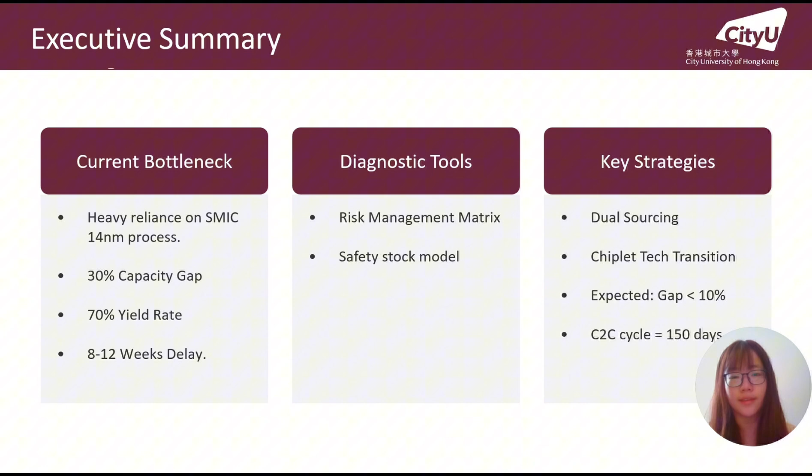At present, the supply chain faces several clear bottlenecks, including heavy reliance on SMIC's 14nm process, a capacity gap, a relatively low yield rate, and delivery delays. This problem shows that Huawei is facing not just a manufacturing issue, but a deeper resilience issue. So our group does not only focus on how to increase production; more importantly, we'll ask how Huawei can build a supply chain that can better resist shocks, reduce dependence, and recover faster. That is the main value of our idea.

The issue is especially important because Huawei is transforming from a telecommunication giant into an intelligent automotive solution provider. In this strategy, the Ascend 610 chip is the computational core of the advanced driving system, like the digital heart of Huawei's automotive business. That means once the chip supply becomes unstable, the impact goes beyond production efficiency. It can directly affect vehicle delivery, customer confidence, and Huawei's future competitiveness in the intelligent vehicle market.

So what is material flow resilience? Our group defined it as the ability to maintain a stable flow from wafers to finished modules under disruption and to recover quickly afterwards. It includes three dimensions: resistance, absorption, and recoverability. Resistance means avoiding single point failure. Absorption means buffering shock through inventory and planning. Recoverability means restoring flexibility through innovation and adjustment. This concept is important because it shows that resilience is not just about solving today's problem, but about preparing Huawei for future uncertainty.

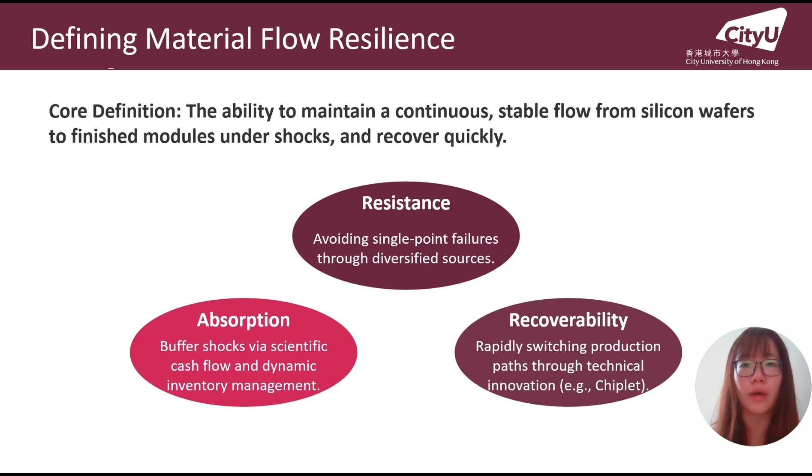Based on this idea, our report will continue in several parts. First, I introduce the background and the concept of resilience, and then my teammate will explain the material flow structure, identify the major risk, analyze the financial constraint, and finally present our improvement strategy. Overall, our key message is that improving resilience is not just about surviving disruption, it's about securing Huawei's long-term competitiveness. Thank you, and now let's move to the next part.

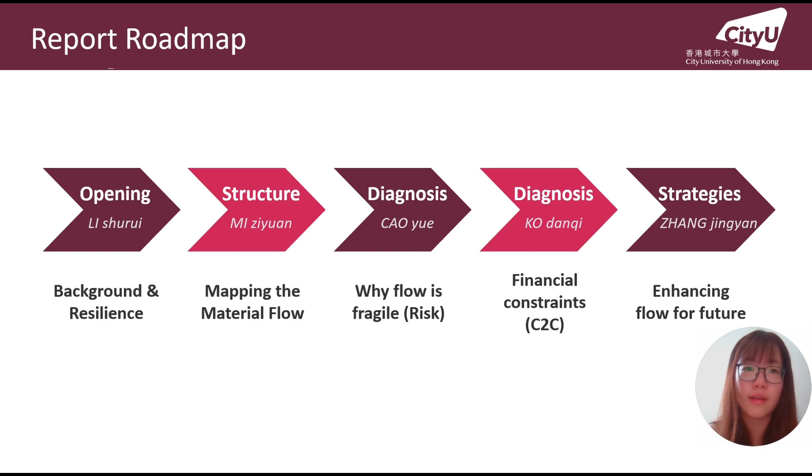Hi everyone, I'm Mi Ziyuan, a student responsible for the second part. Today, I will analyze the material flow of Huawei Ascend 610 automotive-grade AI chips, revealing its key links and potential risks. The Ascend 610 has a clearly defined three-tier supply structure and is a complex network built through the collaboration of 3 layers of suppliers.

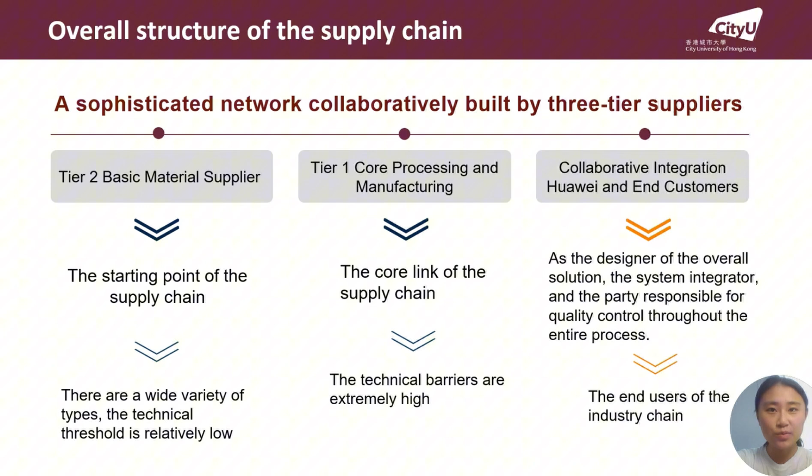Tier 2 basic materials supply serves as the starting point, offering a wide variety but with relatively low technological barriers. Tier 1 core manufacturing and processing is the core of the supply chain with very high technical barriers. Huawei, as the overall solutions designer and system integrator, is responsible for end-to-end quality control and interacts directly with end customers.

In terms of materials circulation, a linear closed-loop chain is formed. Raw materials suppliers across the country deliver materials to SMIC's Beijing or Shanghai factories for chip manufacturing, which are then sent to JCET for packaging and testing, and finally reach Huawei's Dongguan manufacturing center for assembly, eventually flowing to automobile companies. The chain relies on land transportation networks and intelligent logistics scheduling systems, and any interruption in any link will halt the entire material flow.

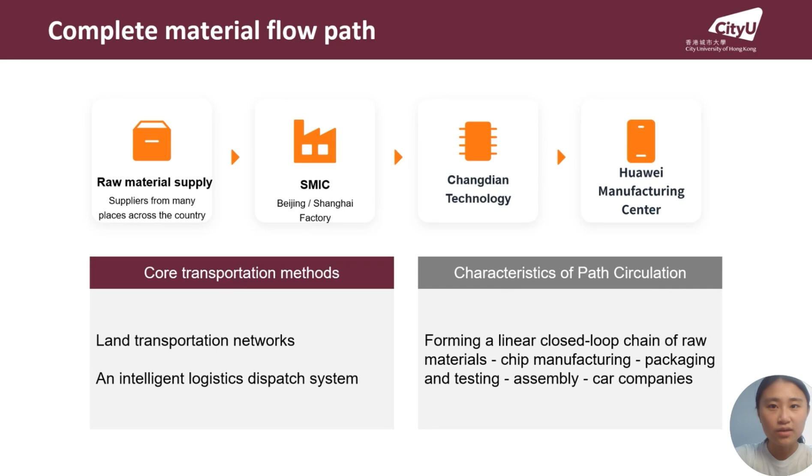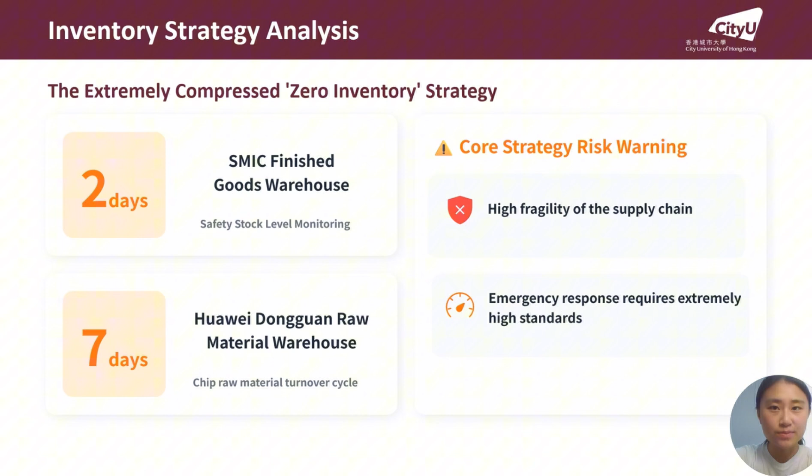It is particularly noteworthy that this supply chain adopts an extremely compressed zero inventory strategy. SMIC's finished goods warehouse maintains a safety stock of only 2 days, while Huawei's Dongguan raw materials warehouse has achieved a turnover cycle of only 7 days. Although these strategies reduce inventory costs, they also make the supply chain highly fragile and impose very high requirements for emergency response.

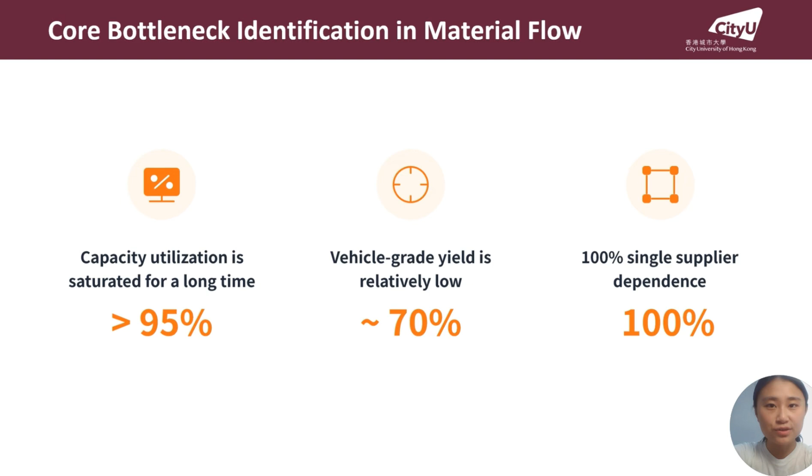Finally, we identify 3 core bottlenecks. First, the capacity utilization rate is long-term saturated, exceeding 95%. Second, the automotive grade yield rate is relatively low, only about 70%. Third, there is 100% dependency on a single supplier. These factors together constitute the key risk points of the current material flow.

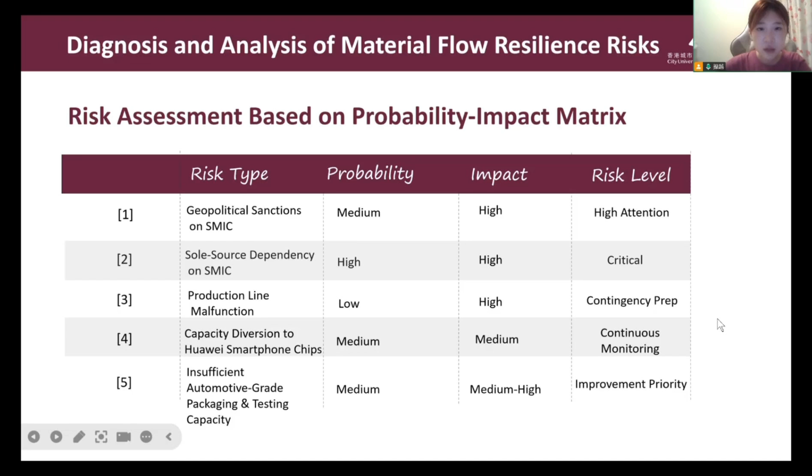Now let's look at the core problem and real impact. The root issue is clear: SMIC is our only foundry. Any production change or disruption directly transfers to downstream automotive clients.

Worse, we face a risk superposition effect. Geopolitical tension, capacity diversion, and packaging bottlenecks happen together, leading to extremely low material flow resilience.

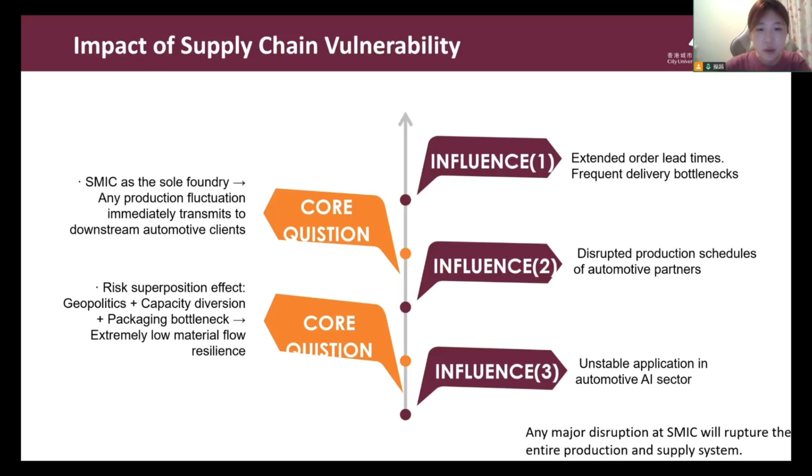This vulnerability brings three serious consequences. First, longer lead time and frequent delivery bottlenecks. Second, disrupted production schedule for our automotive partners. Third, unstable performance in the automotive AI sector. In one sentence, any major disruption at SMIC will break our entire production and supply system.

Let's see the third part: the conclusion and strategic directions. Finally, let's summarize our conclusion and strategic directions. From the analysis, we confirm three quick conclusions.

To fix these vulnerabilities, we propose four actionable strategies. First, qualify alternative foundries to achieve mature process multi-sourcing and reduce single-source risk.

Second, build safety stock and buffer capacity to absorb supply shocks. Third, strengthen cooperation with packaging and testing facilities to expand automotive-grade capacity. Fourth, regularly update the probability-impact matrix for dynamic and proactive risk management.

These steps will significantly improve our supply chain resilience and ensure stable support for automotive business. Thank you.

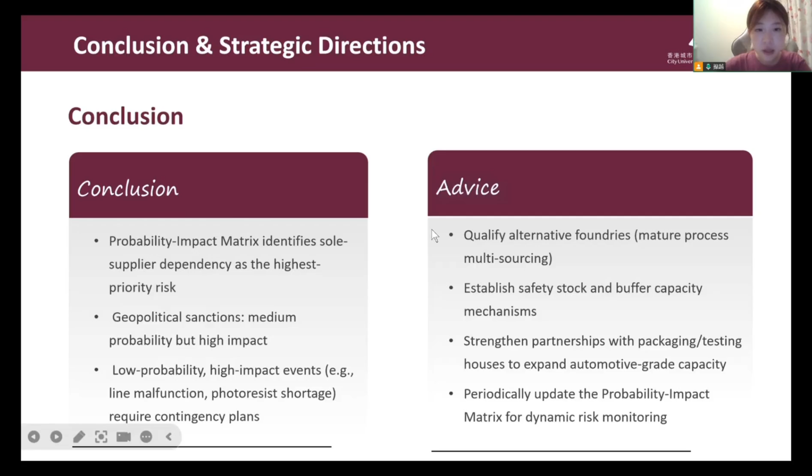Diagnosis and analysis from a safety stock model view. First, let's talk about the three main steps of our analysis. The first is data diagnosis: we collect and calculate historical inventory data, order lead times, and demand changes. This gives us solid data for later analysis.

The second is model application. We use the safety stock model to compute the needed safety stock, then find the gap between the current actual state and the best target level.

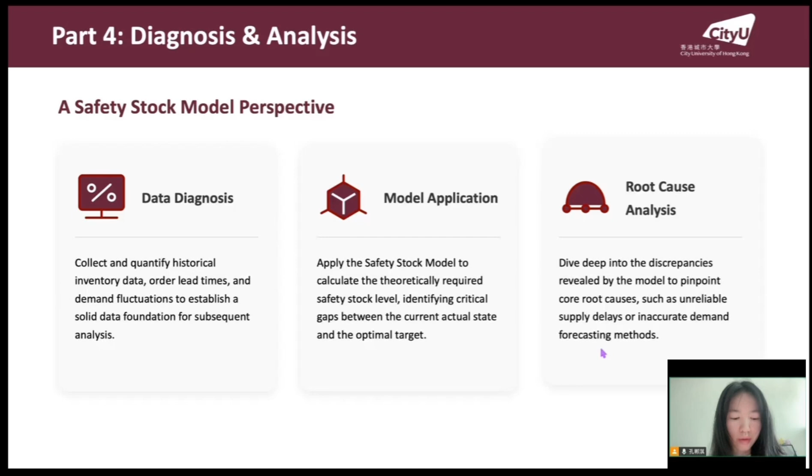The third is root cause analysis. We look deep into the difference from the model and find the real reasons, like unstable supply delays or wrong demand forecasts.

Now let's see the main problems we face. First is the core bottleneck: the biggest problem is capacity shortage at SMIC. This makes supply lead times very unstable and much longer.

Second, supply risks: unreliable delivery from upstream raises supply risks. It messes up material planning and reduces the flexibility of our material flow.

And third, when capacity is tight, this happens: not enough capacity leads to longer lead time, higher inventory, and more resources taken. And last, worst supply instability — this cycle makes our problems even bigger.

We use a simple but clear formula for safety stock. For automotive ASIL chips, we use Z equals 3, which means 99.9% service level, and sigma is the standard deviation of daily demand. We use 200 units per day for normal market changes, and lead time is the average days from order to delivery.

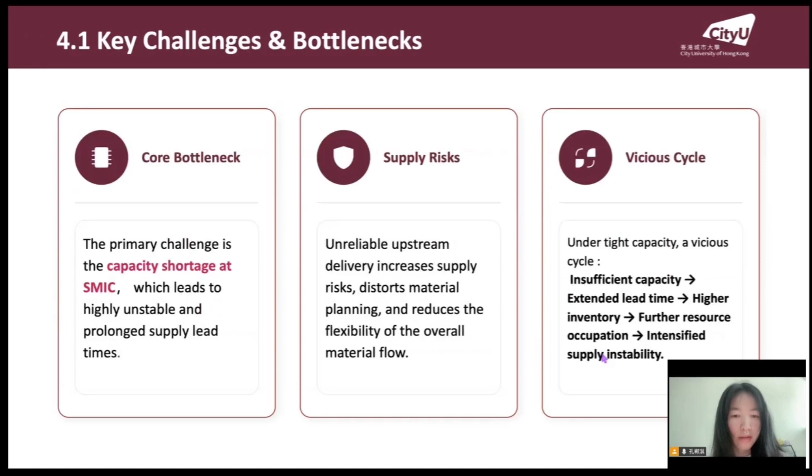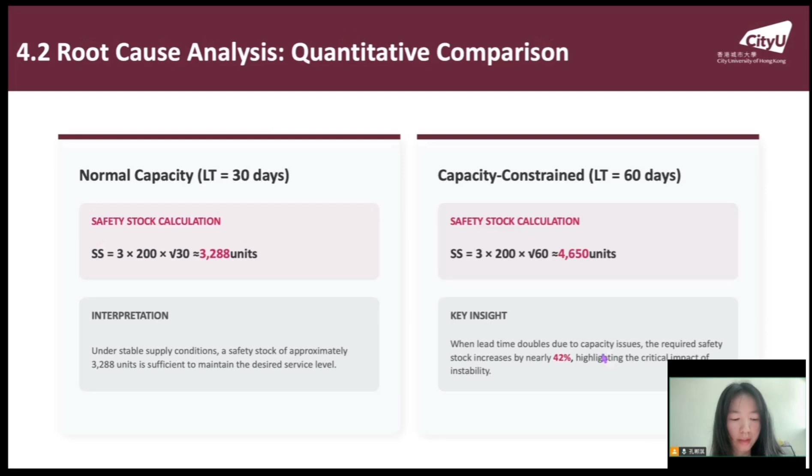Next, we compare two situations. When supply is stable, about 3,288 units are enough to keep a high service level. When lead time doubles, the safety stock equals 4,650 units. Because of capacity issues, required safety stock increased nearly 42%.

This shows longer lead time shortages push up safety stock. The relationship is non-linear, and as lead time goes up, safety stock rises quickly to cover supply uncertainty.

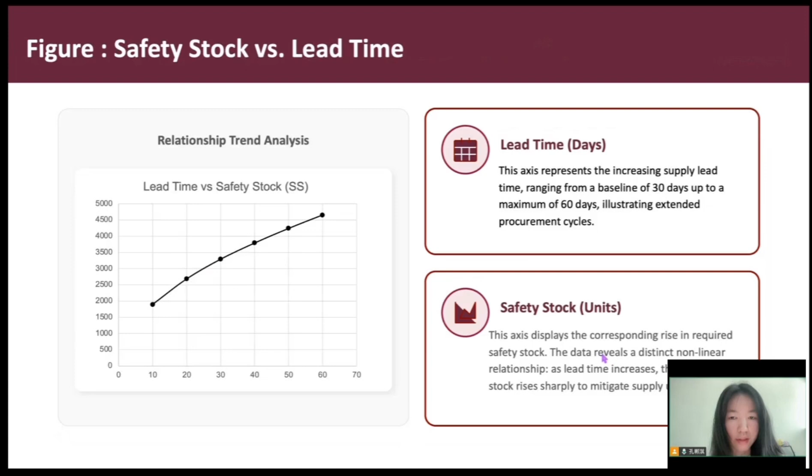Finally, we have four key conclusions. First, the main issue is inflexible supply and long lead time, not demand uncertainty. Second, higher safety stock uses too much working capital. It limits our financial flexibility.

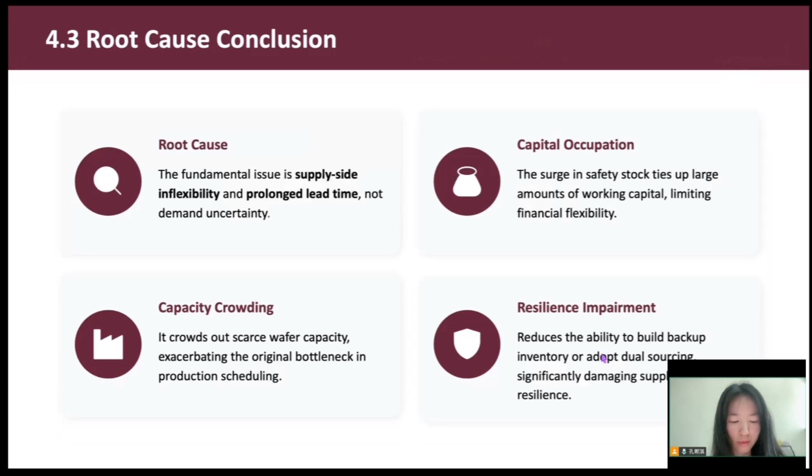Third, more inventory takes up wafer capacity, making the production bottleneck even worse. Fourth, we have less ability to build backup stock or use dual sourcing. This seriously hurts supply chain resilience.

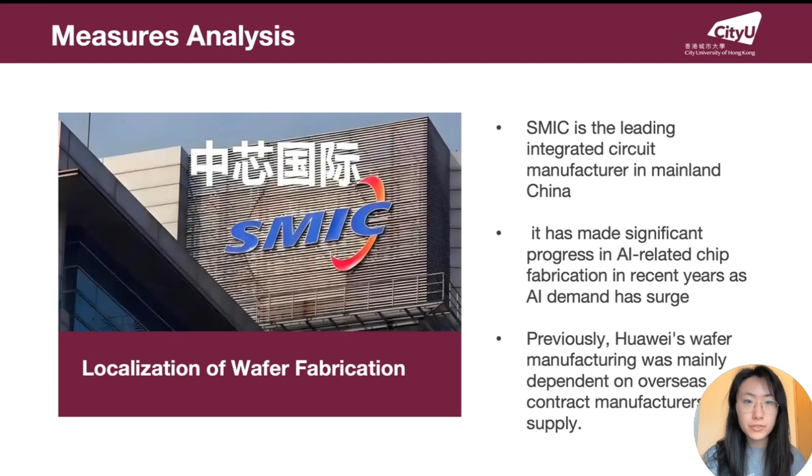Hello, my name is Zhang Jinyan, and I will introduce Part 5: Measures Analysis. SMIC is the leading integrated circuit manufacturer in mainland China. With the rise of AI, it has made strong progress in AI-related chip fabrication.

After Huawei partnered with SMIC, wafer supply for Ascend 610 became more reliable. Previously, Huawei depended on overseas foundries. Domestic control reduced risk from policy changes and cross-border transport. Long-term cooperation stabilized production and pricing. By 2025, SMIC's capacity will reach 45 to 50,000 wafers per month, rising to 60,000 in 2026, giving Huawei room to expand ASIC chip production.

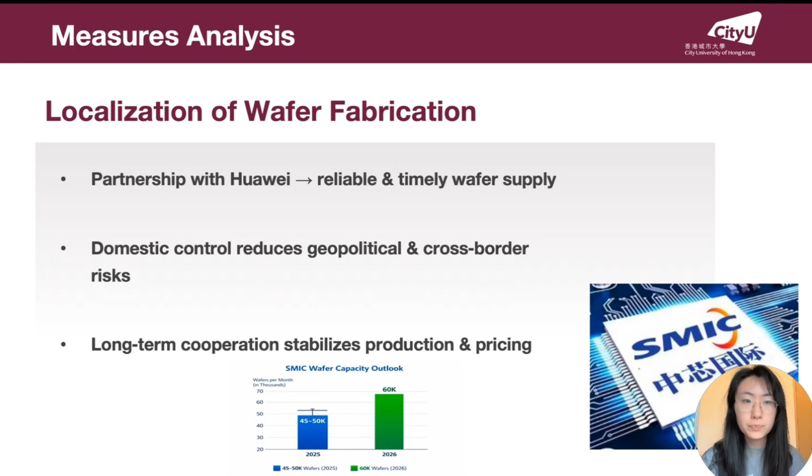JCET is China's leading packaging and testing company. It has achieved breakthroughs in chiplet technology and solved bottlenecks in advanced processes. JCET is the only domestic provider capable of mass production. By handling Huawei's high-end orders, it enabled the full packaging workflow of ASIC chips to be completed in mainland China. This closed loop avoids customs delays and shipping risk.

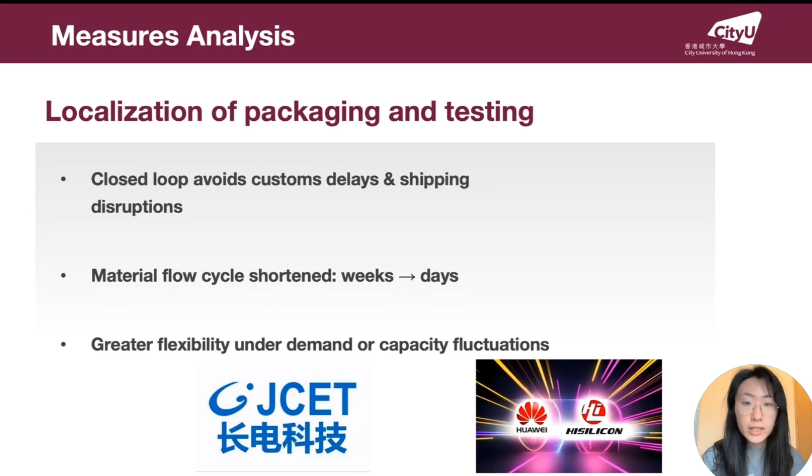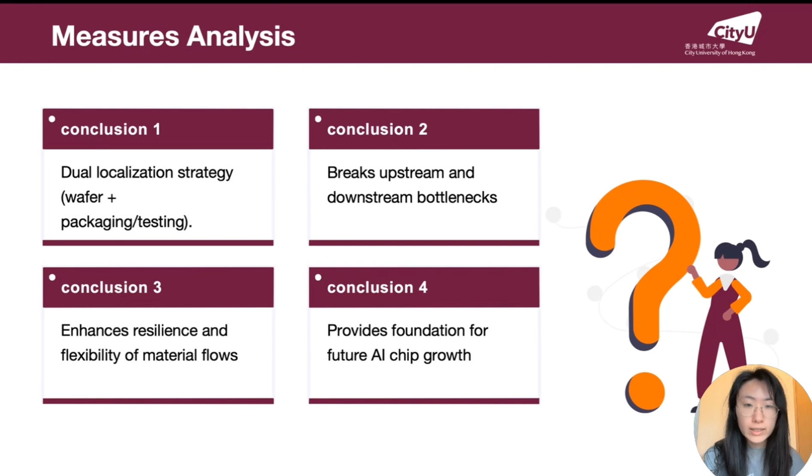The cycle is shortened from weeks to days, making material flows more flexible when demand changes. In conclusion, Huawei's localization strategy in wafer fabrication and packaging testing breaks upstream and downstream bottlenecks, enhances resilience and flexibility of material flows, and provides a solid foundation for future AI chip growth. That's all. Thank you for listening.